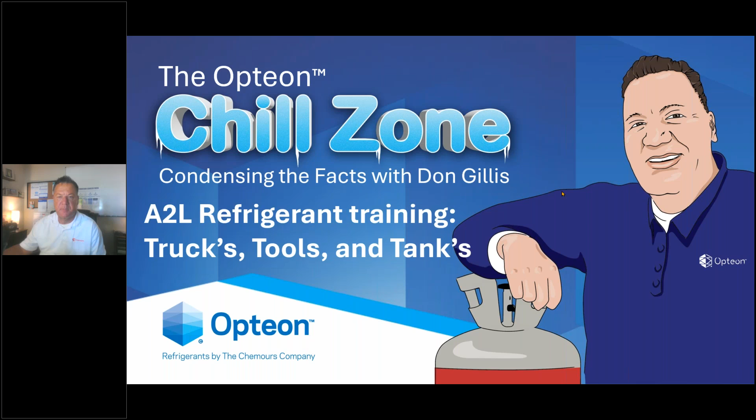As Mark said, we're going to go over trucks, tools, and tanks. At the end, as Mark said, we'll go over some questions. Let's go through some of these slides I have now. There we go. All right.

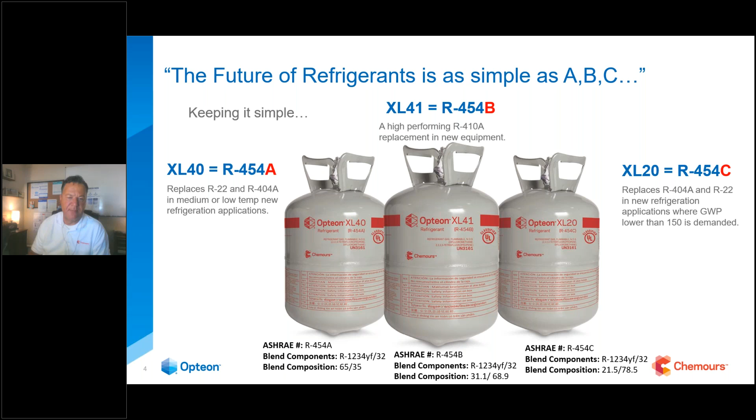The A and C do the same type of work, okay? They're both for medium and low temp. The C will be for units that call for anything less than 150 GWP. So that would be units less than 200 pounds. Anything over 200 pounds would be 454A. Again, the same components make up that blend. That'll be R32 and R1234YF, okay?

So real quick, what's an HFO? For those of you that missed it last week, I want to go over this. So we know what CFCs are, we know what HCFCs are, we know what HFCs are, which we're moving from right now because of the global warming potential. And now we're moving into the new kid on the block, if you will, the HFO or hydrofluoroolefin.

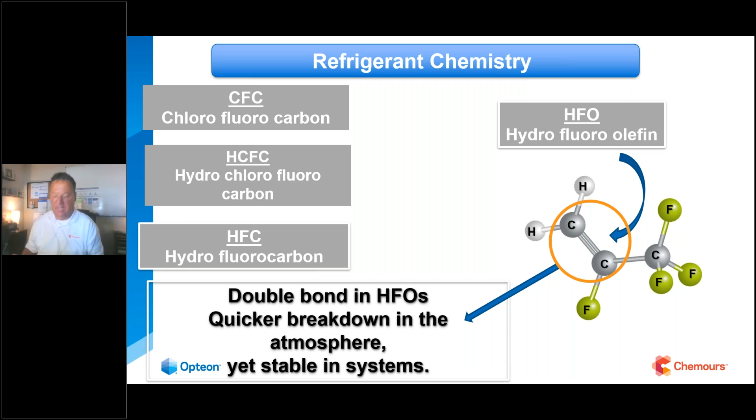By definition, an olefin is simply telling you that you have two carbon atoms next to each other. And this is kind of the secret sauce with an HFO. It's very unstable, so it's a little harder to manufacture, but that's the beauty of it when it gets exposed up in the atmosphere. It breaks up a lot quicker compared to an HFC, all right?

So for example, I'm going to compare 134A on the left-hand side, which we've used in medium temp or the automobile industry for years, and the HFO molecule R1234YF. And you can see the difference down here in the years. It's 13 years that 134A stays in the atmosphere compared to 10 days. So that's really why we're having this conversation.

And the last note here, you may not know what the number, the GWP, means. Just know this: the higher that number is, the faster it's on the chopping block in the EPA's eyes. And that's who's driving all this. It's not a manufacturer.

It's not the government, it's the EPA. They put them in charge, and that's the way it is. So we've got a comparison of 1430 compared to less than 1. So that's a big deal. And that's why you'll see R1234YF moving forward in a lot of blends down the way.

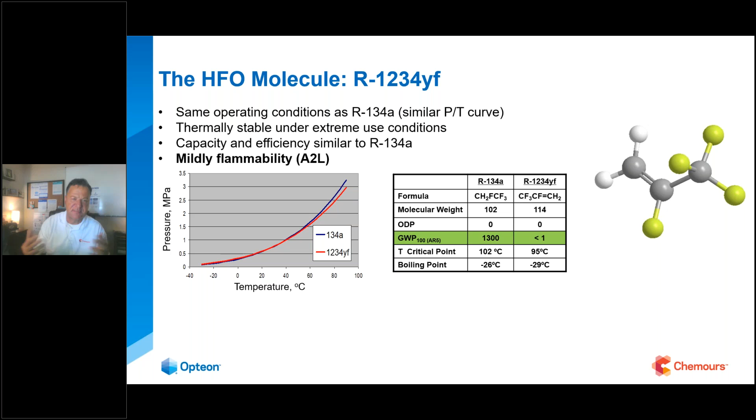Now, this is what it looks like on a PT chart, and you can see how closely it resembles it almost exactly. It's a little less charge than the 134A is. Very, very efficient, does the same amount of work. That's the first and foremost thing we've got to do with refrigerants. That's one of the biggest criteria. Does it do the work? Then we look at GWP, we look at flammability, we look at toxicity and those kind of things. But first and foremost, it has to do the work, okay? Or it's not a good refrigerant, obviously.

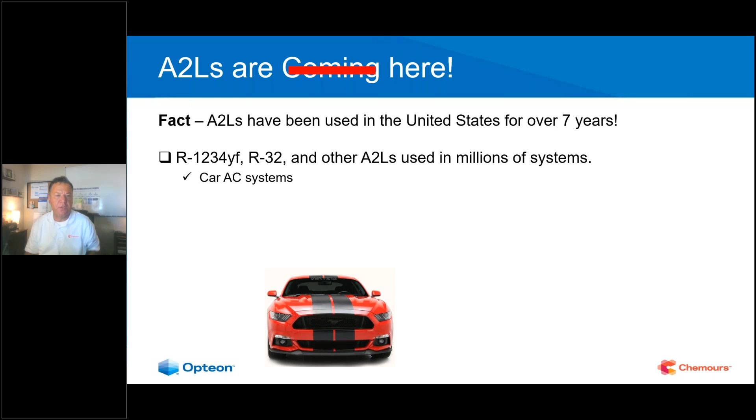So I used to say they're coming at my prior job. They're here. Where are they at? Well, if you bought a car in the last 7 years, every car made today in the United States has 1234YF in it, okay? Up until then, it was 9 out of 10. So it's 100% of those cars. 9 out of 10 in the world have 1234YF in it, okay?

If you bought a window unit in the last 7 years, a PTAC unit, a dehumidifier, a portable system, a mobile system, you've already worked around A2Ls, or you've been around them. Every hotel we all stay in has a PTAC unit. I can almost guarantee you that has R32 in there. A lot of that stuff isn't made in the States anymore. It's Asian driven. R32 derives from Asia, and Daikin specifically.

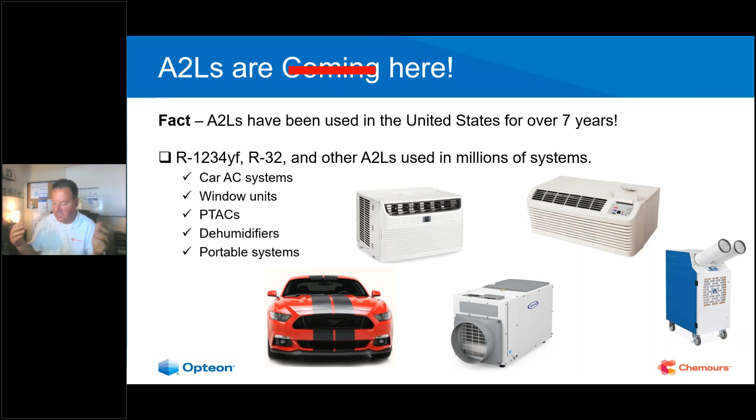And so you see a lot of that already. So it's not really new to us. The takeaway here is that it's already beneath the hood of your car. There's nothing to fear here. And these are just some of the examples of some of the cars today that we're talking about.

Now, what's not changing? First and foremost, currently no A2L testing is required. So take myself, for example, my EPA card will be grandfathered in. There won't be any change in that at all right now. Now, the EPA did take suggestions, and they have not announced those yet, but I have a strange suspicion more than likely nothing's going to change, but I could be wrong. So stay tuned on that. I can't speak for the EPA.

Moving forward, future EPA cards will have A2L questions on them, like we saw when we took our 410A test. It wasn't really a certification on a federal or state recognized level. It was someone coming into the shop, and I'm just explaining what happened to us, and said, we're going to give you a test on 410A. It's going to change the world. This is this new refrigerant. And you took it, you got a certificate, but it really wasn't recognized federally or by the state. So the same concept here with the A2L refrigerants.

Training is important, however, okay? Any training you can get, and there's plenty of it out there, whether it be through Chemours or anyone else. And I'll share a handful of those other areas that I like to use and some of my friends use. Just kind of recommend some places. And you probably have your own training set up at your distributor too.

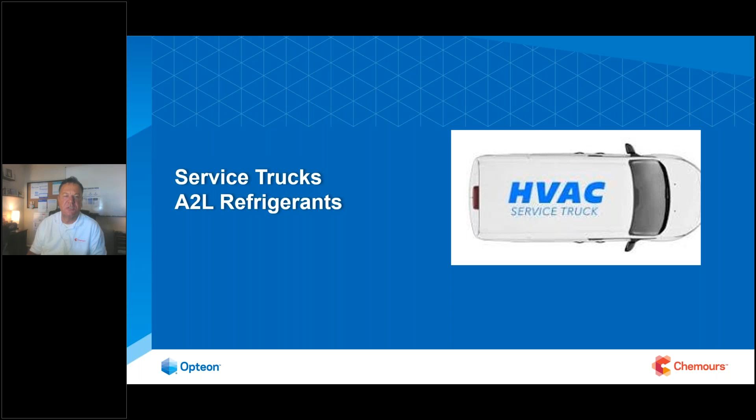Let's take a look at our trucks for A2L refrigerants. Before we do that, we're going to pop up a poll question. Corey, do you have that question? Don, the poll question is up, and I can ask it. The quick poll question is true or false: you will need new placards for A2Ls on your service trucks. So what we would ask is, and people are already ahead of me. They're already starting to.

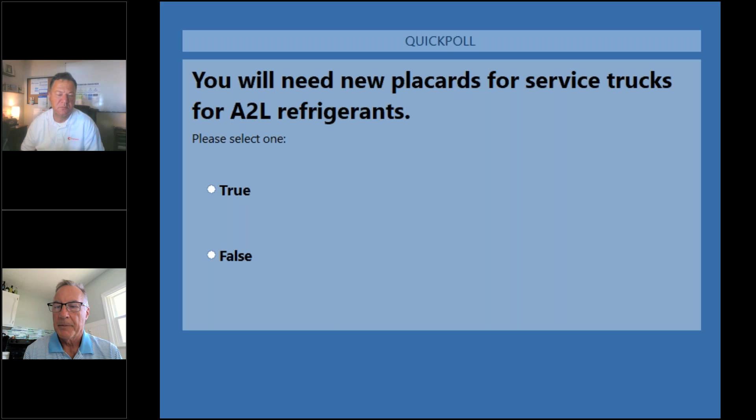Okay, so we'll close it out. What we ended up getting, Don, was 73% voted false and 27% voted true. We had almost a 70% response rate.

Wow, thank you. That's incredible. Thanks, everybody. Yeah. Thanks, everyone.

So the folks that wrote in false, you are correct. No special placards will be required when you go to A2L refrigerants. Box trucks and semis will be different, obviously. So just a high level view of the service vehicles. Under the materials of trade, it's business as usual. What do you mean by that, Don? It's the same restrictions in place as before, and that was 440 pounds maximum, regardless of the hazard. So acetylene, anything, it didn't matter what was in your truck. Now, obviously, that's not one tank, but accumulated. So 440 pounds. So to me, that's good news.

I mean, they didn't lower the pounds, even though it went to a different level or ASHRAE Standard 34 A2L rating. So that's good news. Federally, there are no placards required for service vehicles. So again, it's business as usual. You won't need anything. And that's why we're doing this, to get some of those myths out there and get some of that information, because it's new to all of us, right?

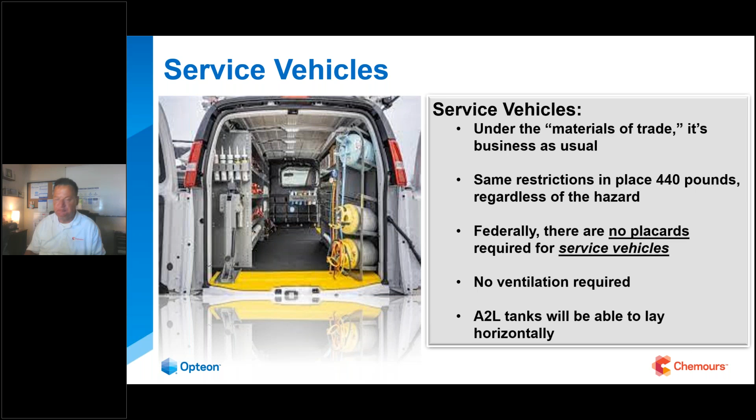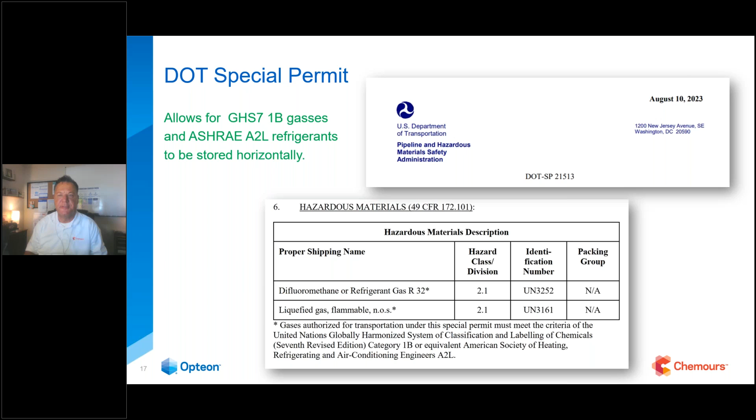Here is the actual permit that will be stamped on the tank for being able to lay horizontally. There was some pushback originally on that, if you don't know the story, and they've got that approved. We did everything that the Department of Transportation wanted us to do, so they gave us a special permit. And Chemours did this for the industry, by the way. By us getting passed, it allowed everybody to use this number stamped on their tanks also. So they didn't have to go through all the hurdles that Chemours started on about 3 years ago, from what I understand, okay?

Okay, tools. We have another poll question. Mark? Okay, so poll question number 2. You will need to buy all new tools when using A2L refrigerants. Once again, it's a true false. So you will need to buy all new tools when using A2L refrigerants. True or false? So once again, we'll give about a minute for folks to respond and select which one of the two options they believe to be correct.

We're getting much better. We have 66% of the folks already responded. So I will just give it a couple more seconds, but greatly appreciate everybody responding. Okay, we're at 70%. Once again, thank you. It's awesome. Wow. So in terms of the poll response, very uniform understanding. This is sort of awesome.

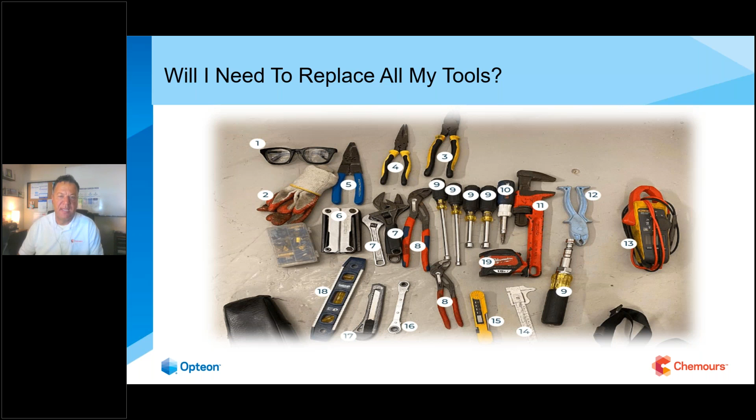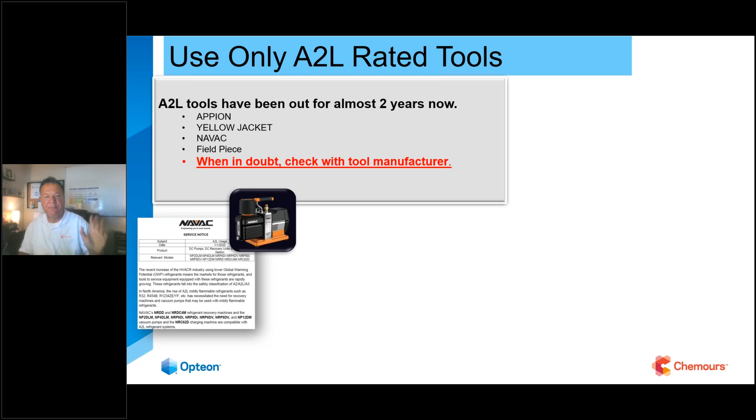And like I said, they've been around for almost 2 years now. And I don't want to name drop any brands. We're not branded here. I started out with just a few of these when I first started. And as time went on, everywhere I would speak or do some training at, inevitably a tool manufacturer sitting in the audience would come up and say, hey, we have that stuff too. And so to be fair and balanced here, I started putting everybody's on there. It started to look like a NASCAR.

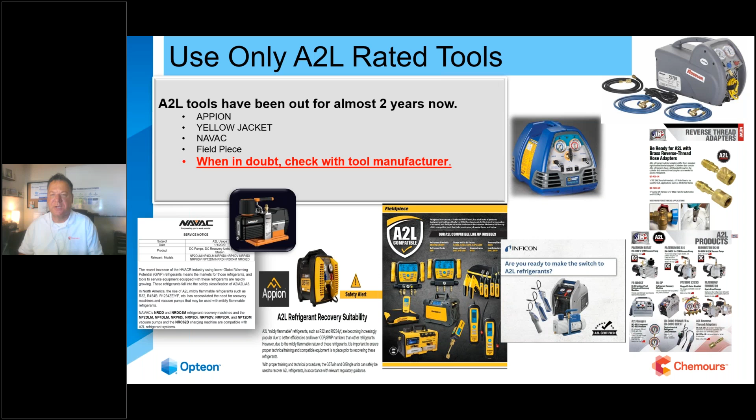So the takeaway from this is everyone has A2L rated tools out there. So they're not hard to find, and you're probably all giggling because you sell them. At the few expos I've been to recently, you can see the A2L sign at their booths from a mile away. Everybody's boasting about it. In fact, I heard one guy say, our tools have always been A2L compliant. I thought that was a cute little marketing scheme there. They've never meant to leak, and they seal up and what have you. So no need to go out and replace all your tools.

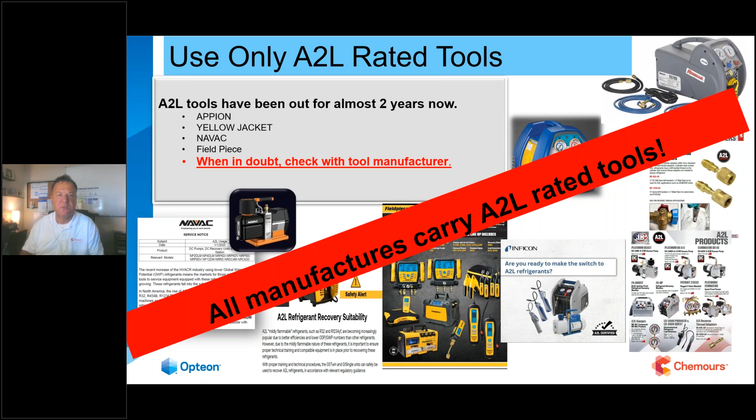So when it comes to all these tools again, we're talking mainly about your detectors. Let's talk about detectors for a second. As I said earlier, with the 454B product and R32, quite honestly, you already have those refrigerants in your detector. The 454B is 1234YF, which is already on a detector, and the R32. So the detector should be the same as it was before.

Now, on compound gauges, if you're old school, or mercury gauges, if they don't have the refrigerant, obviously you have to get new gauges. If you're a digital person like I am, or Bluetooth, which I really love, on the digital you'll just plug them into the computer and get your updates. That's how that's been done for years now. On the Bluetooth, the app will automatically update itself, so you're good to go there, okay?

Again, recovery machines, you'll start to see them say A2L compliant and those kind of things, but quite honestly, it doesn't mean they've changed everything in there. But always check, like I said, if you have something you've had for 20 some years, check with the manufacturer. They'll have the final say. But I haven't heard any horror stories of anyone saying this model does not work around A2Ls, okay? So a lot of things have been tested, electric hand tools, cordless drills, all kinds of things.

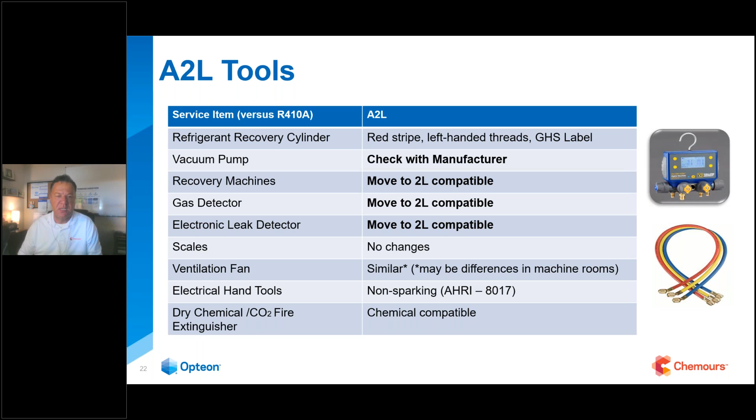Now, unless you're really, really good about purging your lines on every change out, especially if you're in the supermarket industry, because you deal with so many different refrigerants, I would recommend going to different hoses on the A2L refrigerants. That's just a recommendation. I would tell you that almost on anything. I always had 2 or 3 sets of gauges, depending on what I was working on, but just food for thought on that. Okay, let's talk about tanks.

Now, I think I butchered this, Mark. I think I actually already showed the answer on this, and I can throw another question out there if we want to. In fact, I think I will do that. If you see the question, I think I've already answered that. I got ahead of myself a little bit. Hmm. No, is it about the tank horizontally? Yes, but you didn't answer it. Okay. All right. Yep.

Go ahead. So the question is, A2L refrigerant tanks will need to be upright in your service vehicle. Once again, it's a true false selection. Basically, in terms of cylinder orientation in your service vehicle, is it required to be upright or not? Okay, so we'll give folks a minute or so. Once again, we're racing to that over 60%, so this might go a little quicker.

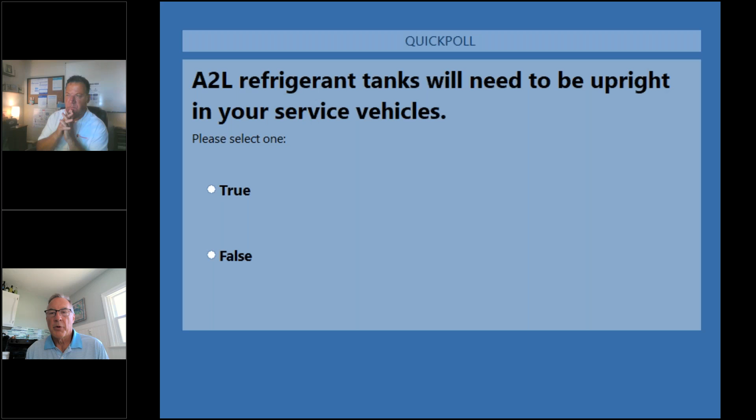Okay, we're actually over 70% on this one. Nice. Once again, Don, I think the information I believe is getting out there, because 94% responded false. Only 6% responded true. Yeah, and I wondered what that would have looked like a year ago, because even on webinars they were still saying that. It's been a big change, and that was very welcome news, as you know, Mark. So yeah, you are correct. We're going to allow those tanks to lay on their side.

Again, the thought process on the EPA, you don't know what you don't know, right? They don't know what we know. We don't know what they know. It's not the world we live in. So the thought process on having that tank vertical was to have a vapor buffer or barrier, if you will, up against that rupture disc on the tank. Their fear was that if you laid it horizontally, like we do now, and you were driving around in your van, maybe on rough terrain or took a turn, that liquid could somehow splash up against that rupture disc if the tank was a little warmer and send it off unexpectedly. So like a premature rupture.

So they really wanted that tested, and like I said, Chemours, kudos to them. They did that before I came here. Actually, it got approved after I came here, but they've been working on that for quite some time. So you will be able to lay the tanks horizontally like we do. And keep in mind, as always, the proper way to do that is you want that safety device, whether it's a rupture disc or this new relief valve that I'm going to show you in a little bit, at the 12 o'clock position. You don't want it at the 6 o'clock position, just to be safe. Not a lot of people do that, but that's the proper way to actually do it.

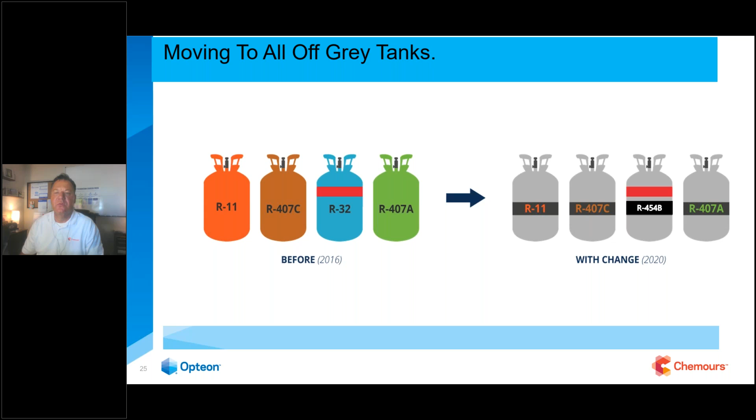Okay. Also, the purpose for the left-handed threads. So you'll have a red band around it. Also, by the way, the recovery tanks will also have a red band on them. They will also have left-handed threads, if you haven't heard yet. Those are being produced right now as we speak, since about a month and a half ago or so. All DACs will have left-handed adapters. You will need an adapter to change it back to right-hand threads. I know that sounds a little silly. I didn't really like the idea at the beginning, to be honest with you.

But being a technician for years in the field and spending so many years in a truck, and our oldest son being a licensed contractor today, you see nationwide, and I'm sure in your area, new technicians starting in the industry every day. And there's thousands of them nationwide. And some of them, like it or not, are being put in positions that they're not ready for. Same thing happened to me. I went from preventive maintenance to running service calls simply because we were 50 calls behind.

So I like this idea now even more so, and here's why. If Julie or Jim are out on that call and they're new to service and they go to try to put their hoses on that tank and it doesn't go on, I'd rather see them call you at the distributor or the service manager or someone they trust and say, hey, don't get me fired, but this isn't going on. Stop what you're doing. Does it have a red stripe around it? Yes, it does. Okay, that's A2L.

So it's a learning curve. It's more of a pause button, if you will. And I really, really like that. Okay. So those are two flags. If you knowingly put A2L refrigerants in an existing system, you are knowingly breaking law. Okay, so the red stripe, the left-hand threads, that will be your go-to. And a lot of the tool manufacturers are making their own little adapters with a little more flexibility, a little more length on them, and they're all really promoting that out there right now.

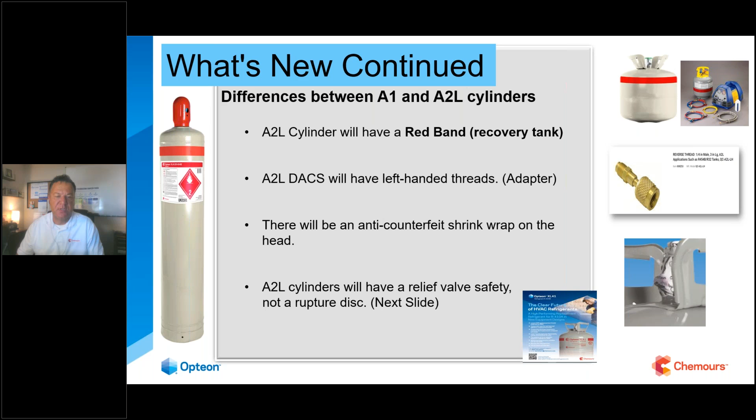Okay. A2L cylinders will have a relief valve safety, not a rupture disc, and I'll go into a little more depth on that. So the way a rupture disc works, on the left-hand side, you see the A1. If it gets above a certain temperature, and I'm going to say pressure, a lot of people throw out 130 or 125 degrees. It's not a perfect science, because every refrigerant is going to have a different pressure temperature relationship. As we all know, it's our saturation, right? So it's going to be more based on pressure. So I really don't like to throw an exact number out there, but they have used for storage temperature 125, 130 degrees for years.

So the way it works is if it were to get above those temperatures or above the specs on that tank, the rupture disc is designed to pop and blow the whole charge. So you're keeping something catastrophic from happening, like turning it into a giant hand grenade. That's how A1 tanks work, and that's how they still will be moving forward. Now to the right side of the slide, we see an A2L tank. This is going to be more like a spring-loaded relief valve. It's set just a little bit higher pressure, for the 454B, for example, not much more, but similar.

The big takeaway from this is it's an extra step they wanted to take. It wasn't required, like the left-hand threads, for this safety device. It's just an extra measure the industry decided to do to put everybody at ease. And if it should exceed that pressure that it's rated for, it will just burp and let enough pressure off to put it back into a safety zone. Okay, I know, if it were 125 degrees Fahrenheit or 130, you wouldn't be in your truck anyways, but anything's possible.

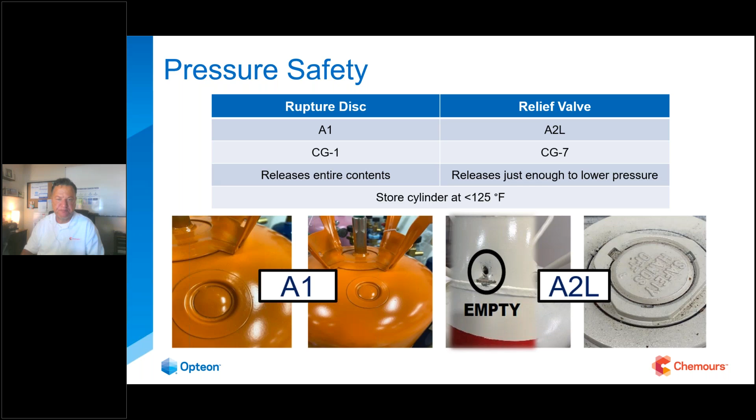Okay, frequently asked questions. Will we need to update our 608? We touched on that already. The answer is currently no. You're grandfathered in, and new tests will be included for A2Ls. So recap on what will change as far as handling A2L refrigerants. On your service van, nothing changes. Contractors will need to obtain A2L compatible tooling, okay? Get training, can't emphasize that enough.

Get your training, okay? Right now, the certificate that we give out in our in-person and online training is as good as it gets, whether it's ESCO or anyone else, because there is nothing federally or state recognized through the EPA. So these aren't really that flammable? The answer is A2L refrigerants are almost exactly what we're using now. They're fairly close. If you saw the first episode, it was all based on flammability. I really tried my best to remove the fear mongering as much as I can. It doesn't mean you don't need to respect it, just like you did.

Next month, we're going to get into service installation. I'll explain to you the extra steps we're going to be taking when you go to install something from a 410A to 454B. So don't disrespect it. Like anything else, make sure you respect what you're working with.

What about changes in performance compared to 410A? So the answer, 454B was engineered to perform similar to 410A. Oil will be exact for 454B and 410A. That will be a POE 32. R32 will be a little heavier, higher viscosity. It'll be a POE 46. R32 by nature runs a little warm, and we got to watch that discharge line temperature. So it will be a heavier oil, POE 46, on that, okay?

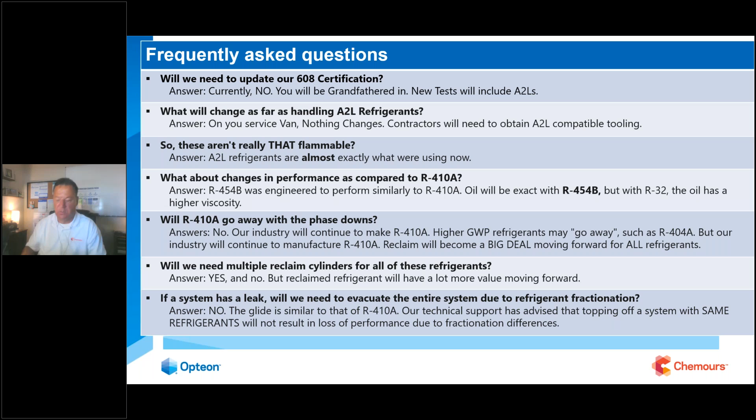New to A2Ls. I want to show this with you. I'm coming to the end here. This is a new, if you haven't, I've shared it. We shared this the first time we did the chill zone. And this is something that's been out probably about 2 months now, but it's really, really cool. It's an interactive map of the US, and California's highlighted only because the person who was doing this webinar had his mouse on California, but it's all blue, and you touch on the state you're located.

It does a drop down, and it literally tells you in real time cities, home rule states being added, A2L standard adoptions, NFPA, your fire, equipment categories. It breaks everything down for you, so you know in real time what county, what city, what municipality you're in, whether it's in the code books already or whether it's already been approved in the state but just hasn't gotten in the code books yet. Really, really cool interactive map.

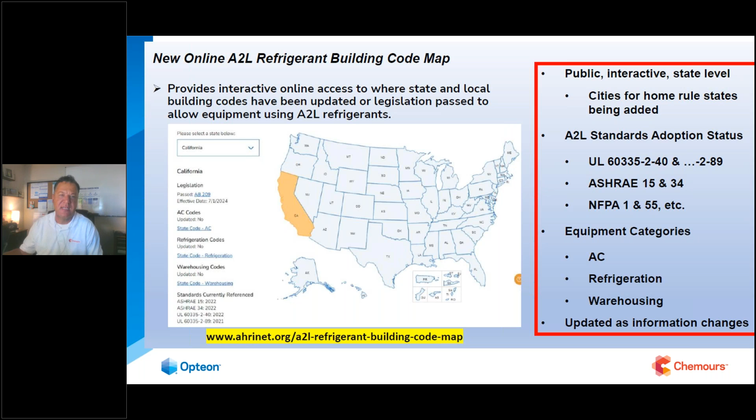And the reason I say this is really cool is because we've been doing training for a long time, and you would have to try to remember what the different states required and the different cities and what have you. Because maybe at one time it wasn't approved for the state, but it was approved in the city. So it was a little confusing. So this was really well needed and we're excited about having it. So share it with your customers, if you will.